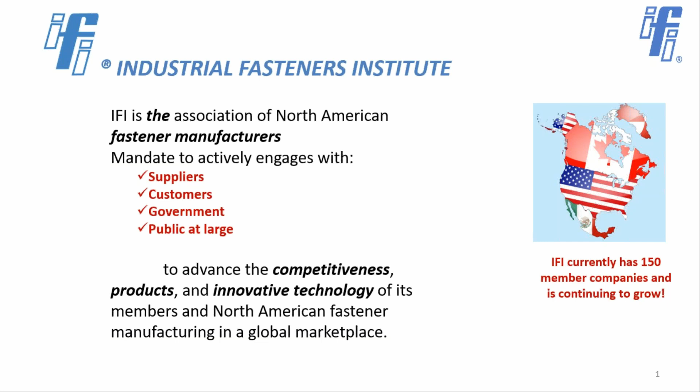The IFI is headquartered in Cleveland. In fact, it was established in the late 1930s. Since joining the IFI in 2015, IFI now has a satellite office in Montreal because that's where I live and work from. So if you need any information about the IFI and our products, you can go to the website, which is www.indfast.org.

Just a little bit about how the IFI is organized. Essentially, we have about 150 member companies, and these member companies are divided into divisions based on the industrial sector that they service. So we have Division 1, which are industrial products, and Division 2 manufacturers, which service the aerospace industry, and Division 3 manufacturers who service the automotive industry. And then what we have is what we call the ASD, or the Associate Suppliers Division. And in terms of the geographical distribution, IFI is North American, so we have the bulk of our members in the United States and a significant number of members in Canada. And up until recently, we now have 2 Mexican members as well.

These next slides are going to give you an idea of these different products that the divisions produce. So the industrial products is the broadest category. It can be anywhere from construction products, structural fasteners, to fasteners used in machinery, equipment, to the standard hardware that you find at your hardware store, and so on.

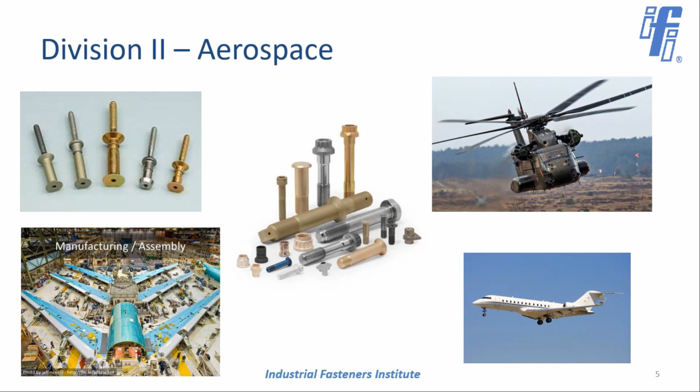Division 3, Automotive. These are manufacturers that supply almost entirely or entirely the automotive and/or truck industries. Most of these manufacturers are located in the Midwest, Michigan, Ohio, Illinois area, but a little bit outside of those areas as well, primarily in the Midwest.

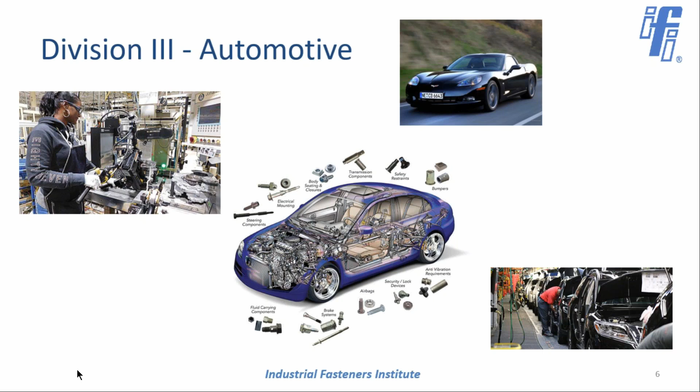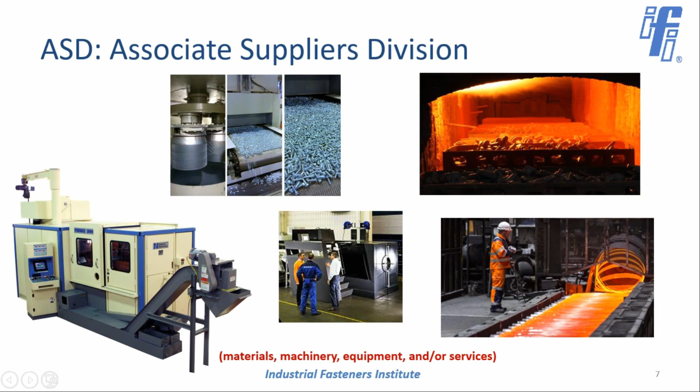And then the Associate Supplier Division. These are companies that produce products that are either used or provide services to the fastener industry. This could be companies that provide plating and coating services, heat treating services, and all the major steel mills that supply rod product to the fastener manufacturers are members of the IFI, as well as manufacturers of equipment, whether cold heading equipment, thread rolling equipment, or sorting and inspection equipment. These are all companies that are IFI members through our Associate Suppliers Division.

Now, just a little bit about the technical activities, which goes to the heart of what we're talking about today. We provide technical and engineering support through the role that I play and the people who support my function. This is basically people who will call and ask questions, and it's limited to our membership and companies that subscribe to our IFI Technology Connection.

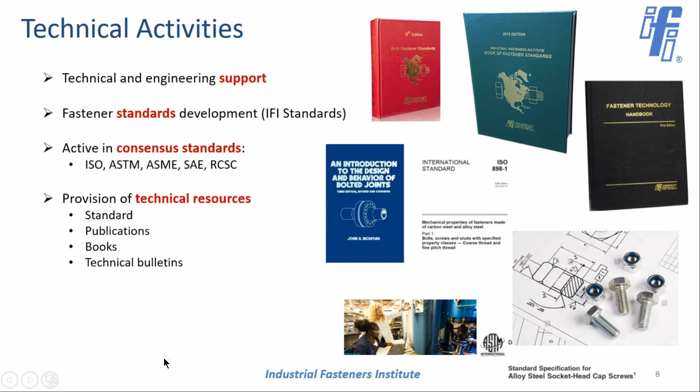We're also very much involved in the development of fastener standards. We have our own collection of IFI standards, but at the same time, we get involved in the development of the consensus standards, the ASME, ASTM, and ISO standards as well. We also provide a family of technical resources. These may be offering different groupings or single standards and publications and books, as well as technical bulletins, which are one-page documents that provide information on a specific topic.

And the IFI also plays a role in terms of sponsoring research and development. IFI is a member of the Bolting Technology Council and a member of the Research Council on Structural Connections, so IFI monies go towards the research projects that are initiated by those organizations. And IFI was a major sponsor of the McGill University Hydrogen Embrittlement Facility, which was a facility that I created 12 years ago, but with great amount of help from the IFI.

IFI also does a lot of training and educational programs. Lawrence Klaus is our Director of Training and Education. We provide training classes to our members, which we call the members-only classes, but we're also very much involved with the Fastener Training Institute. That's the Fastener Training Institute that is putting on this webinar today, and we sponsor a lot of the Fastener Training Institute classes and programs, and we're very proud to do that.

In our training, there's a lot of emphasis on understanding the standards and hands-on, basically touching and feeling the parts and testing the parts. So a lot of that is part of it, and again, very, very strong programs. We're also involved with the Fastener Education Foundation and Rock Valley College, where these organizations, or at least Rock Valley College, are dedicated towards developing header operators and machine operators in the fastener industry.

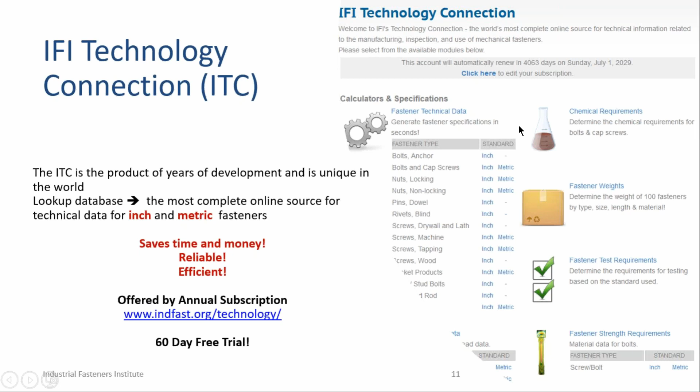So we'll start off telling you about the 2018 edition. You can buy it from the IFI directly, or from the Fastener Training Institute. But if you want to know what's in that standard, they have a published table of contents you can download from the IFI website, or just ask me and I'll send it to you.

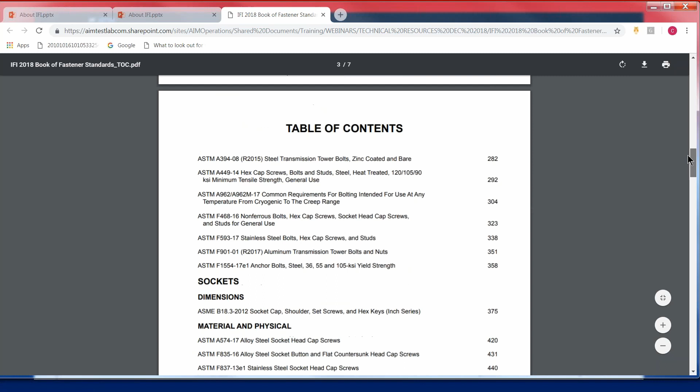It's got a section on threads. It's organized just like the previous book, broken down into a section on threads, a section on bolts, studs and threaded rod, dimensional, and then material. The socket section, material and physical standards, and the dimensional standards. Structural fasteners, material and physical, of course.

And one of the important things, you need to know that the new F3125, F3125M is in this book. It's not necessarily new now, but you'll notice there's no A325 or A490 standard in there anymore, for example.

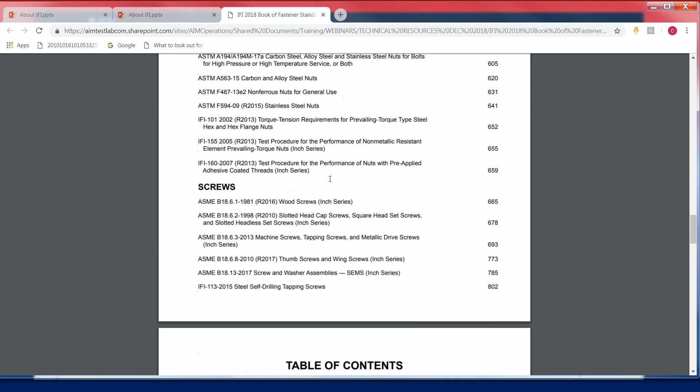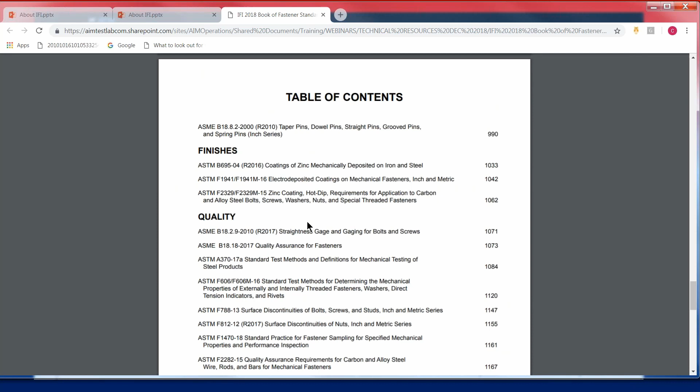The nut section, the screw section, of course, washer section, a more expanded rivet section, pins and finishes, including, most importantly, the new version of F1941, F1941M for zinc plating. More standards on quality are included, and a section on grade marking.

You'll just need to look at this book. It's got a great table of contents, and it's also got a great index. So you can look in the book by the Consensus Standards Organization, or you can simply look by the type of standard that you're after for the particular product.

When you get a subscription to the IFI Technology Connection, you also can get a subscription to the IFI Online Book of Standards, and that's kind of what that looks like. When you log on to your IFI screen, you'll have either one or both of them. We're going to start off with looking at the Online Book of Standards.

I'm going to go ahead and actually log in, and this is going to be live on the internet here. So this is what it looks like. I'm going to log into my version of IFI, and there are my two products, the Technology Connection and the Online Book of Standards. Here's the Online Book of Standards coming up.

We start off with filter by designation or title, so we can look for our standards by product, similar to how the IFI book is laid out, or by organization based on the Consensus Standards Organization that publishes the standard. So let's say I was looking for an IFI standard, IFI 101, which I just used yesterday. It actually brings up that standard, and we can close our filter and see a nice large picture of it.

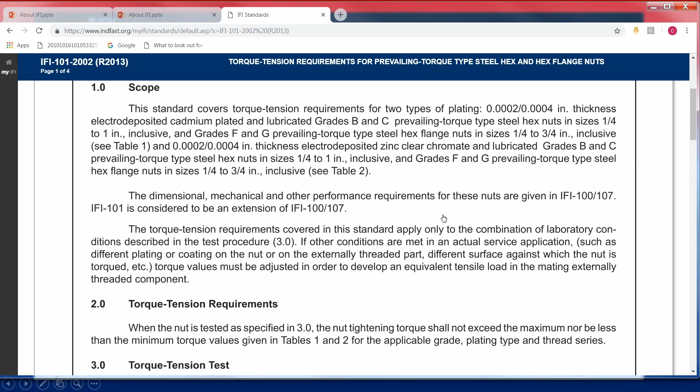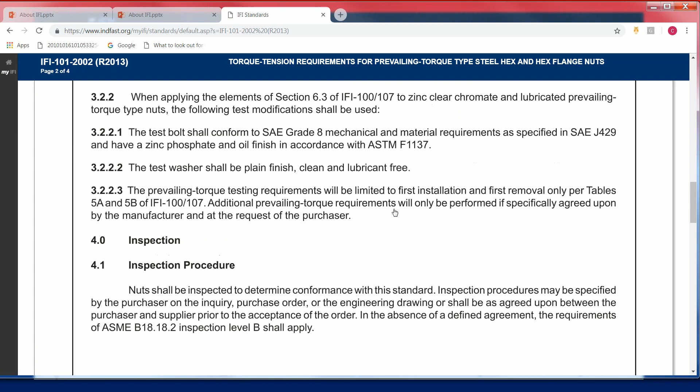Now, you can't print out from this, and you can't save it to a file, but you can capture a portion of the screen. I do this in my work all the time, where let's say someone needs some information from a table, and I'll just go ahead and snip it, take my snipper out, snip that information, edit it and copy it, then put it in an email and send it off to them. So you're okay to do that.

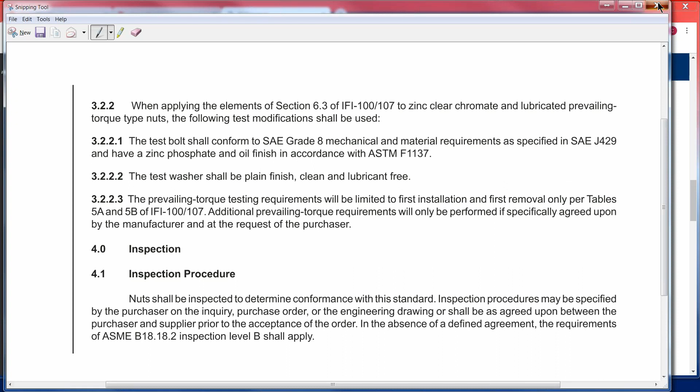So that's as much as you really need. And I just want to share something with you that I think you'll hopefully find useful and interesting.

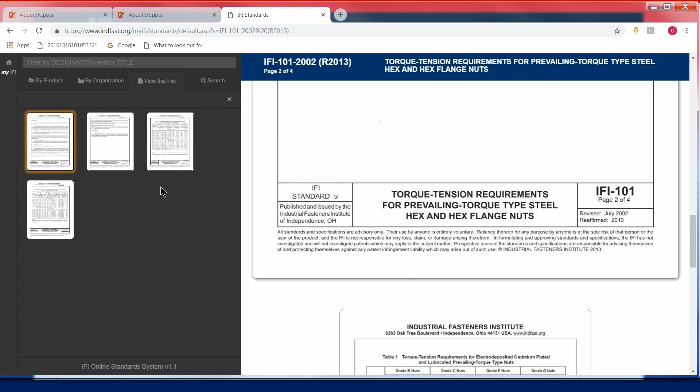We just here at AIM went through our A2LA audit for our ISO 17025 lab accreditation the last 3 days, and we used the IFI online standards collection during the audit. It was extremely powerful from the perspective of document control, because if you have a registered quality management system, whether it's ISO 9001:2015, AS 9100, or ISO 17025 for a lab like we have, the auditor is going to want you to demonstrate that you have control of your documents. You can't just be randomly opening books and pulling out papers.

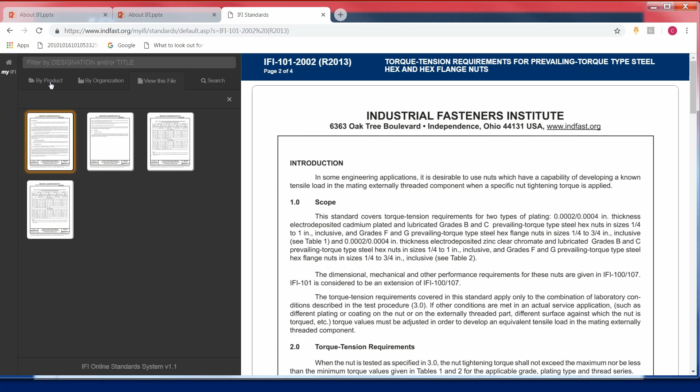This online browsing product that the IFI has, and the ISO online browsing platform as well that you'll see later, is the absolute gold standard in making sure that you have the controlled document of the latest version. So if you have a quality management system that's registered and you have regular audits, this product is just a no-brainer. You absolutely have to have it.

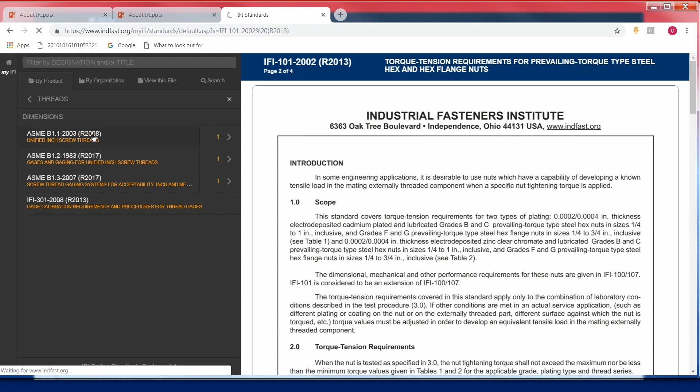So let's go ahead and look by product. Here are thread standards. There's B1.1 — this is where all of our standards for thread dimensions come from. And you'll notice it pulls up the actual standard, not the IFI version of it that you'll see in the book. So this is the ASME version of this standard.

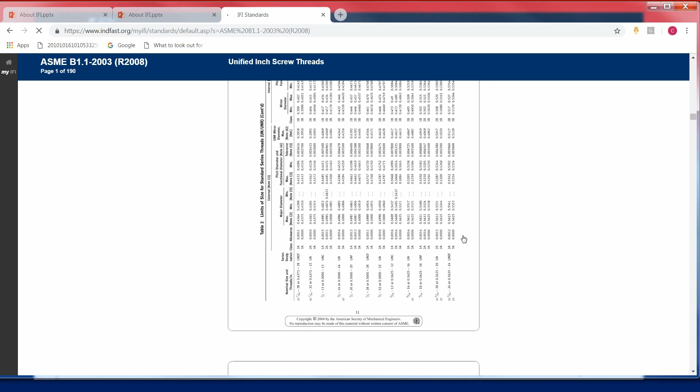And so there are big tables in here, you'll notice, and those tables come sideways, so we have to go ahead and turn them right side up so that we can see them. That's just by pressing the arrow keys at the bottom of your computer. Sorry, don't want to make you seasick there.

And you can snip out of this and copy and paste it into an application or your email, just like you can any other standard.

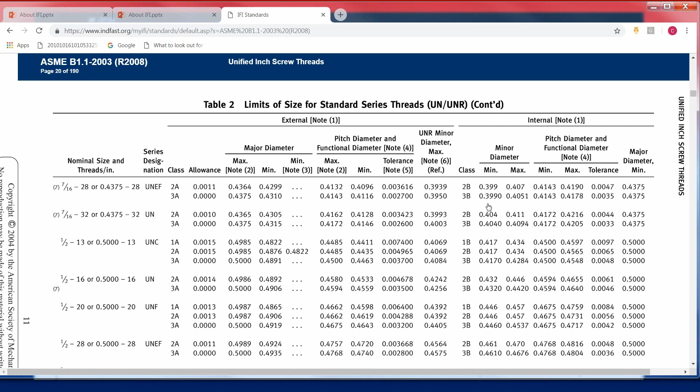So Carmen mentioned that the look of these standards is basically the native format. What you get in the book is the content is exactly the same, but the book basically standardizes the format from the different standards organizations so that it makes for a nice one-type product book. But the content is exactly the same.

There are, in some cases, some things that we excluded from the book because it was not necessary, like some appendices in some of the standards. But you have access to the full standard when you have the online version.

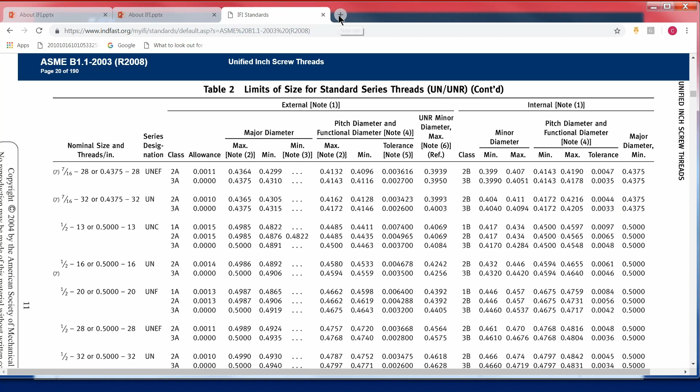So let's go ahead now and take a look—should I go deeper into the online standard, Salim? Is that enough? Given the amount of time we have, yeah, that's enough.

Let's go ahead and go to the technology connection then. And I'm going to demonstrate for you the central heart of the technology connection, which is the Fastener technical data section. And then Salim is going to demonstrate all of the other features, very powerful features on the left panel over here. And then I'm going to show you about the technical bulletins.

So essentially, the Fastener technical data section is broken down by fastener type. And it's kind of interesting to discover that there's a lot of different fasteners, but not very many categories are necessary to describe them all.

So let's say we want a bolt or a cap screw and it's an inch variety. Once we click there, we get all the various dimensional types of bolts and hex cap screws, and there are 30 different categories there. And we can select one of these standards, and let's say we're going to want to know about a hex cap screw.

And so we select that, and now we have an opportunity to pick a standard, or we can pick dimensions only. If all we're concerned about is measuring the part, not necessarily its performance, we can only get the dimensional data if that's what we choose.

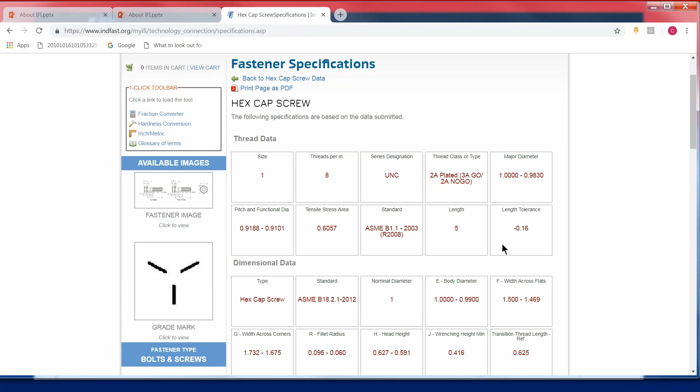We'll generate our specification, and now the screen shows us first off all of the thread data, where the specifications come from, what the pitch and functional diameter would be, what the tensile stress area is, our length of our bolt, and our length tolerance for inspection purposes.

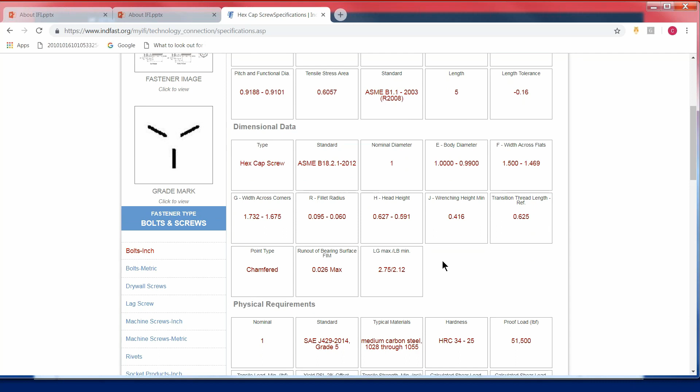The rest of the dimensional data in terms of things like head height, width across flats, whatever else you need to inspect is here. Then the physical requirements: the nominal size, the standard, the typical materials, what the hardness requirement, proof load requirement would be, tensile yield, tensile strength, calculated load for shear strength.

Now, these shear strength numbers do not come in the standard. These are just based on a percentage of the actual tensile strength of the product.

And finally, we get a calculated pretension that is 75% of the yield strength, and that is based on the tightening torque and the K factor for the coating that we chose. In this case, this K factor is 0.22 for zinc.

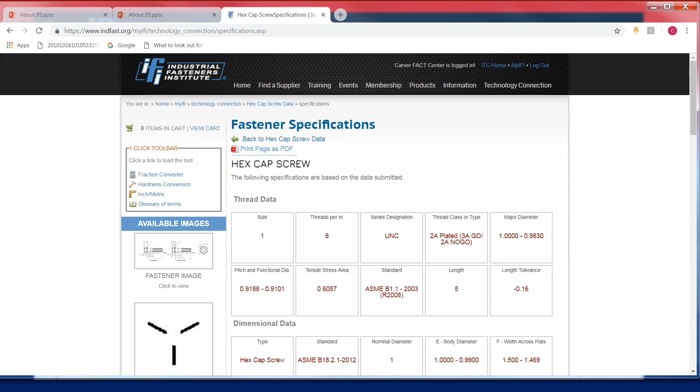So this is very powerful to have on the screen, and then it's even more powerful when we can go back and open this up as a PDF page.

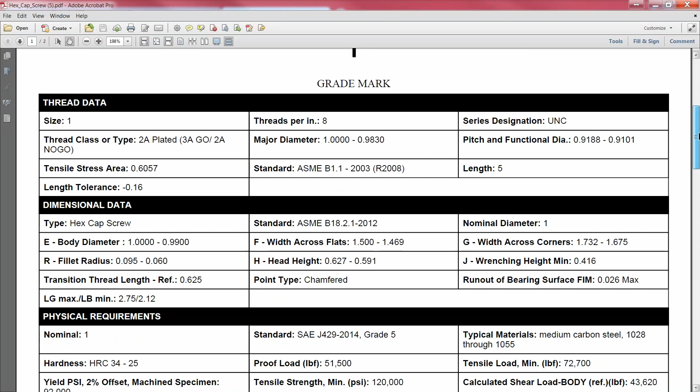And we can save this. It's an editable PDF, so you're able to edit it if you want. It will have the IFI logo at the bottom, and you can change that to your logo. If you're a subscriber, IFI will do that for you.

So this is, you just cannot ask for a more authoritative citation for inspecting product or giving information to your customers that essentially helps them to make decisions without you having to be giving technical advice in a way that puts you at risk.

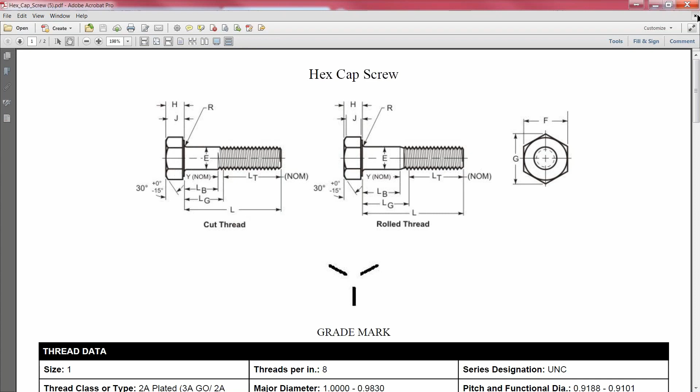Again, that's very useful because it avoids having to spend a lot of time. And the whole point of the Technology Connection is that it gives you all the resources that you need at your fingertips without having to search far and wide.

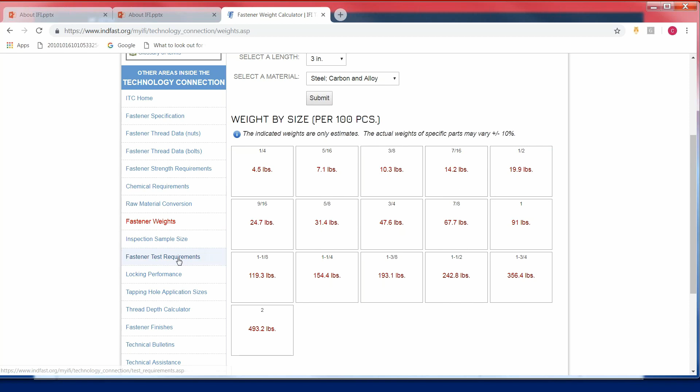Another one would be fastener test requirements, and this is the last one I'll demonstrate, but there are a lot of other ones as well. So here you basically pick a standard that you have to provide or supply parts to. So Carmen's picking A354. And when he clicks on submit, you get basically a set of information that tells you what's required in terms of tests for that standard.

So core hardness is required, decarburization is required, proof load is required, wedge tensile for 3D and longer fasteners, and so on and so forth. And it tells you surface discontinuities have to be checked in accordance to ASTM F788, and it refers you to F606 for the methodology on how to do these different tests.

And then, Carmen, you're going to talk about the technical bulletins.

Yes, thank you. Many of you who have asked me questions will from time to time get my answer accompanied by one of the IFI technical bulletins.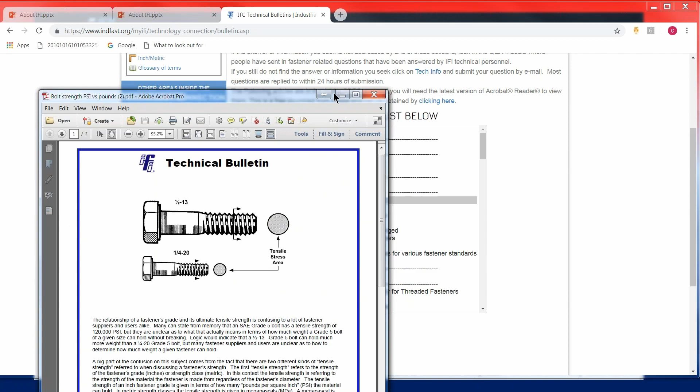So a customer might have a question regarding, let's say, what's the difference between PSI and pounds when it comes to strength of a fastener. IFI has a very nice document on this. We can open that bulletin, and it helps explain technically that the strength of a fastener, when we have the finished fastener, is based on the tensile stress area times the strength of the material.

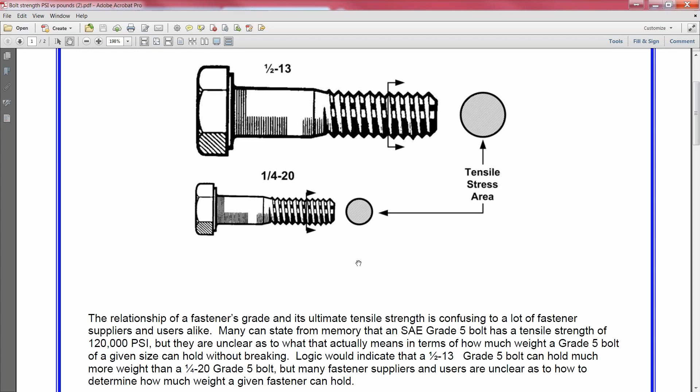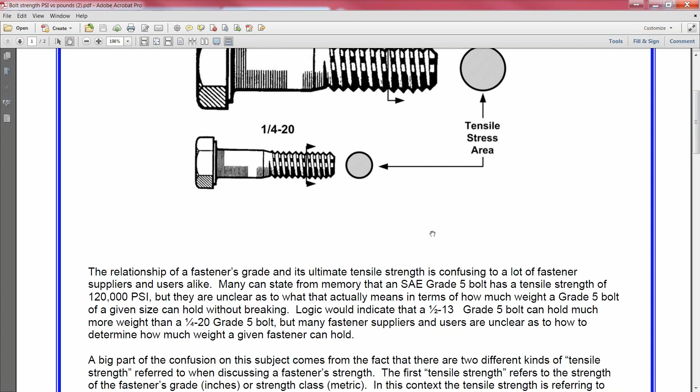So a grade 5 half-13 bolt and a grade 5 1/4-20 bolt both have a tensile strength of 120,000 psi, but obviously the 1/4-20 bolt is not as strong as the half-13, because we get to the strength by a calculation of the cross-sectional area through the threads times that strength. So it's a very quick and easy way to help people understand many different concepts in fasteners.

And so if we look down the list, there's an engineering section, a finishing section, the Fastener Quality Act is in there.

Lots of good documents. This is the most amazingly complete resource for hydrogen embrittlement information regarding fasteners. Salim's great paper on hydrogen embrittlement is in there.

Inspecting fasteners, for example, we often run into issues with customers not knowing how to inspect something, whether something is reasonable or not, and how to do it.

Manufacturing, metric—these two bulletins essentially are your authoritative citation about why you should convince, guide, or help your customers choose ISO standards for their metric products.

How to deal with quality issues, updates on some compliance issues such as REACH, what's up with stainless steel, for example, how to deal with thread galling issues, thread engineering. There's lots of good information about thread engineering and thread inspection.

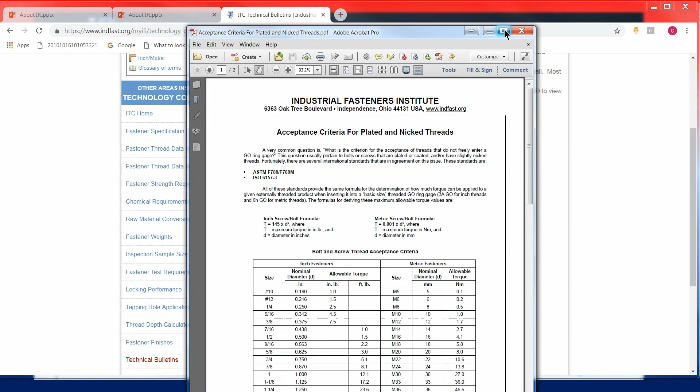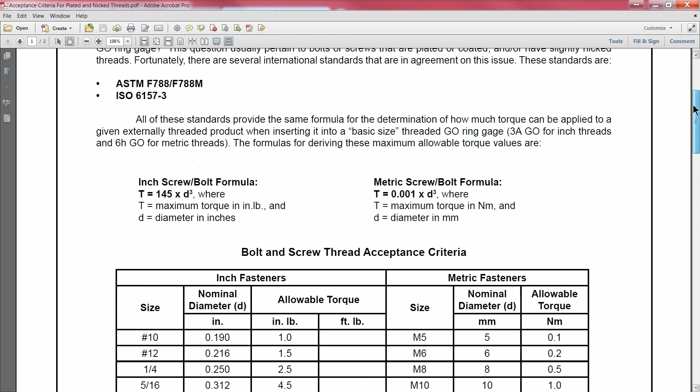One, for example, I'm going to open this one because I've used it a lot, where customers are inspecting threads and they have some nicks, so the ring gauge won't go on. And we have a good set of standards that allow for a certain amount of torque to be applied with that ring gauge based on ASTM F788 or ISO 6157.

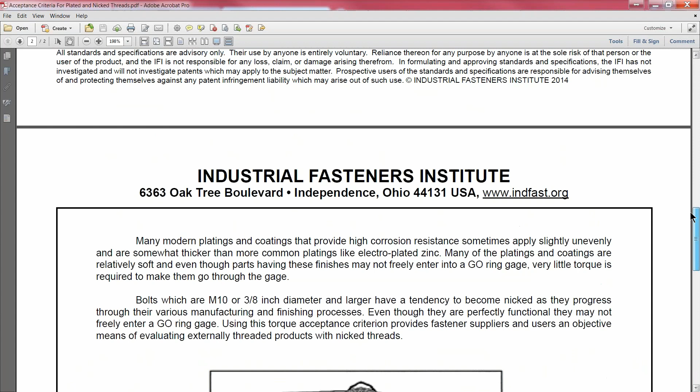So this actually has the actual data in it, not only the reference standards. Very powerful for helping a customer be able to accept a product that they want to accept when it might not necessarily take the ring gauge just because of an issue with some minor nicking.

And then there's documentation regarding how to properly install fasteners and torque tension, know-how with torque wrenches and so on. If we had time, I would open them all for you—I think we could do a whole webinar just by opening these bulletins and explaining them.

And finally, this last one, I'm going to let Salim finish up talking about the technical assistance feature of the technology connection. Thank you, Carmen.

So as a subscriber to the Technology Connection, you can ask for technical assistance by clicking on the technical assistance button. You put in your name, your email, and you ask your question, and usually within 24 hours you'll have an answer to your question.

And so that's a powerful thing. It's available to our members, and it's also available to the subscribers.

I just want to conclude by telling you how you can access these different products. So you basically go to our IFI web store and go into the products tab. You can buy the book, you can buy the online collection, you can buy the technology connection.

Now the book, the list price is $600 per copy. If you're taking an FTI class, you get a significant discount. And if you're a member as well, you get a significant discount.

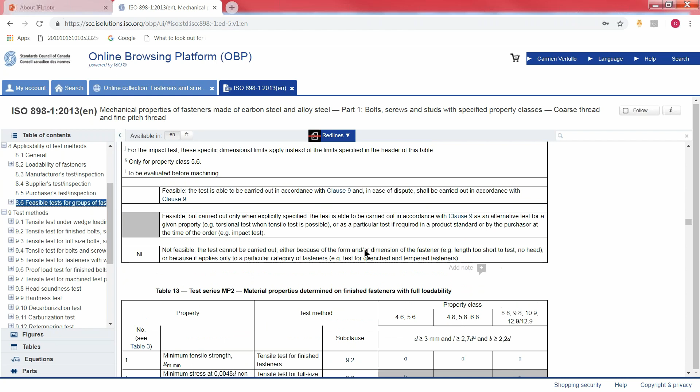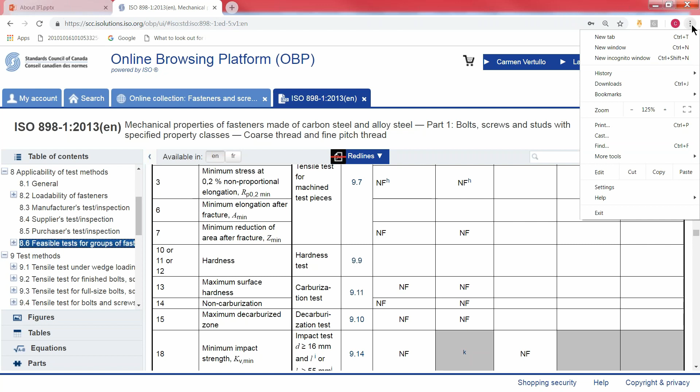That's where our material information for metric fastener standards comes from. It's got a nice browser to get through the standard. Once again, even though you can't print it, you can snip from it, and I am always snipping out of this and sending it to a customer. If you want to see it a little bit larger, you can just change your browser magnification and you can get these to come up larger if you have a table that's maybe a little too small to see in the native size for browsing.

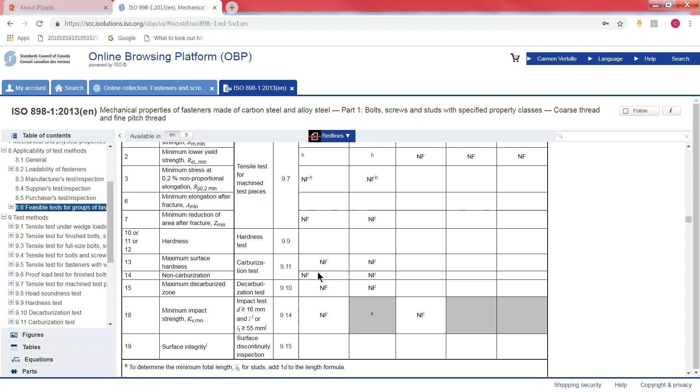So I can go back and it's just a browser. It's just like being on the internet, that's how it works. There's nothing very complicated about it.

The other nice thing about it is if there are redlines available, that is the previous standard. I didn't show you that on 898-1, but it will tell us what changed between the two standards in their transition. So this can be really powerful as well, to be able to see the redlines.

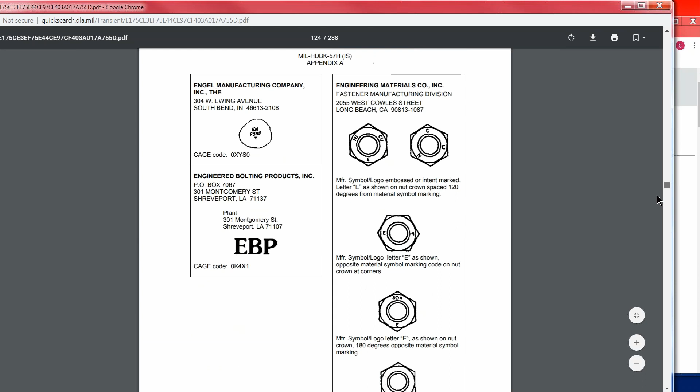Okay, get rid of that, and we'll get rid of that. And we'll take a look at one more of our favorite standards organizations, and that's the Research Council on Structural Connections. They published a document that's very important called the Specification for Structural Joints Using High Strength Bolts. And if you are into structural bolting at all, you should have this document. You should read it, you should understand it, you should share it with your customers, because this is the document that's going to get you out of trouble or prevent you from getting into trouble if you're in the structural bolt business.

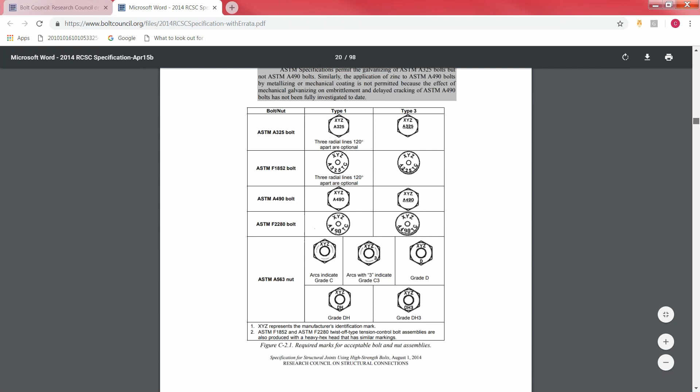And it's free - free to anybody that wants it. Not only that, even if you're not into structural bolting, reading this document will give you great information generally just about how bolts work and what's important. So I recommend that you go ahead and download that. It's free as free can be.